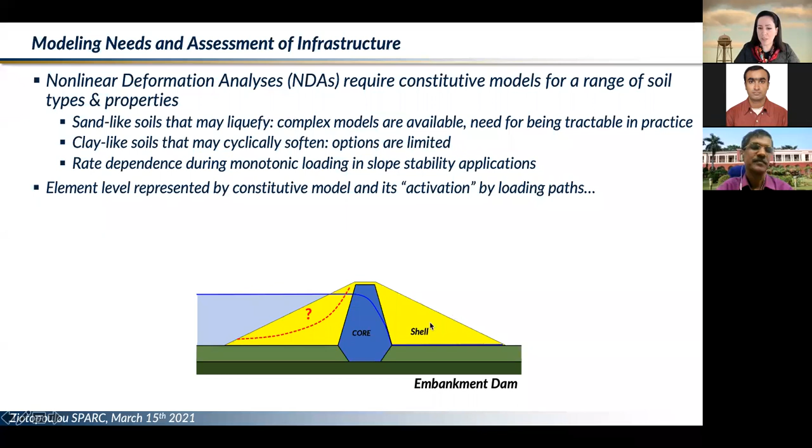In all of these types of simulations, the element level is represented by constitutive models, and I heard some mentionings from the earlier speakers regarding the utility of constitutive models. One needs to understand that those are activated by specific loading paths as they're activated by the problem at hand. Of course, one also needs to understand that simulating a system level is basically the assembly of not only the constitutive model, but also the platform, the different choices, the site investigation data, and the broader understanding that the analyst has of the problem at hand.

Just to keep everyone on the same page, constitutive laws typically describe the stress-strain behavior of soils. They can be expressed in either total or effective stresses, with different pros and cons depending on the application. In the broader form, they connect some stress increment with a strain increment or vice versa, where this D matrix, or tensor, can be as complicated as the problem needs it to be.

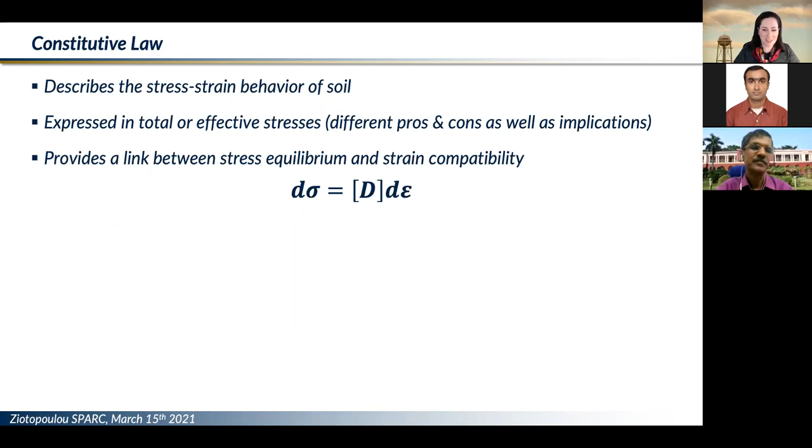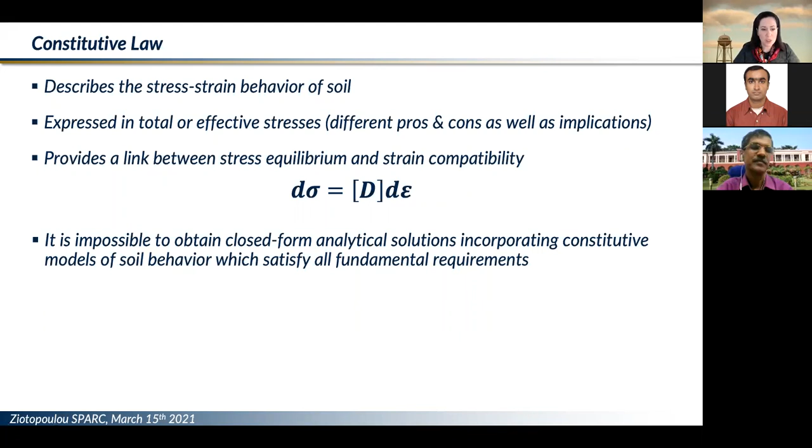Now, of course, it is impossible to obtain closed form analytical solutions and incorporate all the constitutive models of soil behavior to satisfy all the fundamental requirements that we may have for the soils that we're looking at.

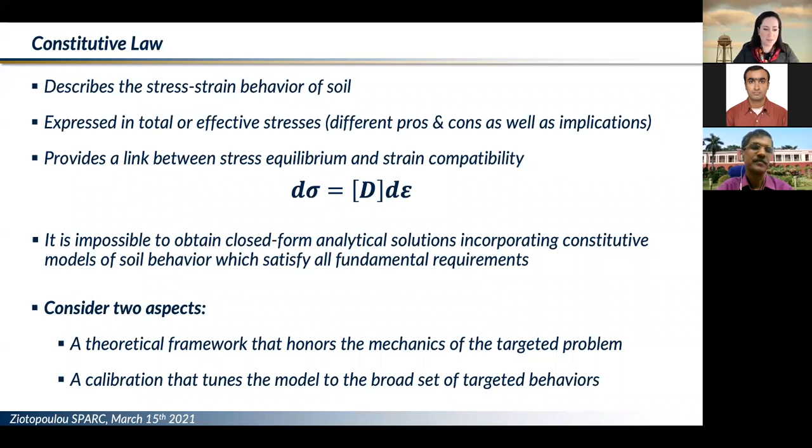Of particular interest, and something to keep in mind as we look through the different types of models I will be talking about today, we need to consider two aspects. One is the necessity to have a theoretical framework that honors the mechanics of the targeted problem, but also a calibration. It's usually convenient to see these as two separate procedures, of course intimately connected, but still separate, that tune the model to the broader set of targeted behaviors, aiming to address the different types of operating conditions.

So my presentation for today is going to briefly go over constitutive modeling of sands for nonlinear deformation analysis. In that context, I will focus on the broad range of behaviors we are setting our eyes on for sands. I will talk a little bit about the PM4Sand model formulation and calibration.

Then I will be spending some more time compared to the beginning on similar types of developments, but for plastic silts and clays, again for the context of nonlinear deformation analysis. Then depending on time, I will discuss a comparative calibration of PM4Sand and PM4Silt for the Cadia TSF tailings materials against some available laboratory data, openly available of course.

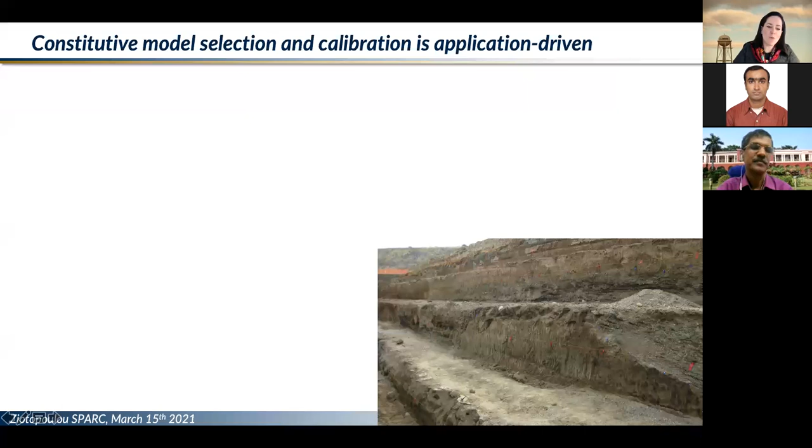I will share plenty of material so that each attendee can take this study as deep as they desire. But the one thing I want to keep in mind today is what we know from our soils in the field. In the most typical applications, the types of data we will receive are going to be SPTs, CPTs, shear wave velocity measurements, and then of course some index tests from the lab.

And it's only in more needed, or well-funded I guess, applications where we will get some more site-specific laboratory information. Starting from these types of information, we then rely on the broader body of knowledge that we have on soil behaviors, which provide us empirical or semi-empirical correlations, and then, of course, typical responses about what to expect.

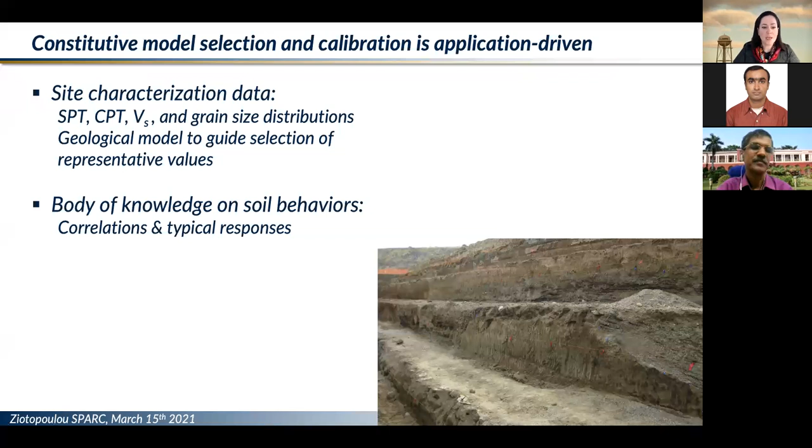Now, talking specifically about liquefaction and connecting now the types of properties we have with responses that we may want to keep our eyes on, we will be interested, of course, in triggering types of relationships, whichever one each one desires to use. Here I'm showing cyclic stress ratio versus equivalent clean sand corrected penetration resistance.

We can see that also as a relative density x-axis. We may be interested in how the cyclic stress ratio varies with the number of cycles. That can be viewed as the effects of duration. Here in this plot, the different types of curves are different based on the relative density that they represent.

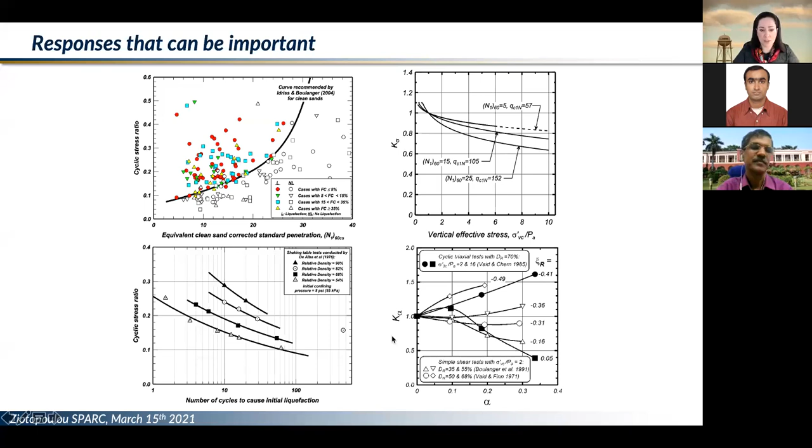We may be interested, and actually it may be necessary depending on the application, to honor the effects of overburden. Here, for those of you familiar with liquefaction triggering evaluations, captured as the K sigma factor, or equivalently the K alpha factor, targeted at correcting our cyclic resistances for the effects of sloping ground, compared, of course, always to the baseline condition of a level ground.

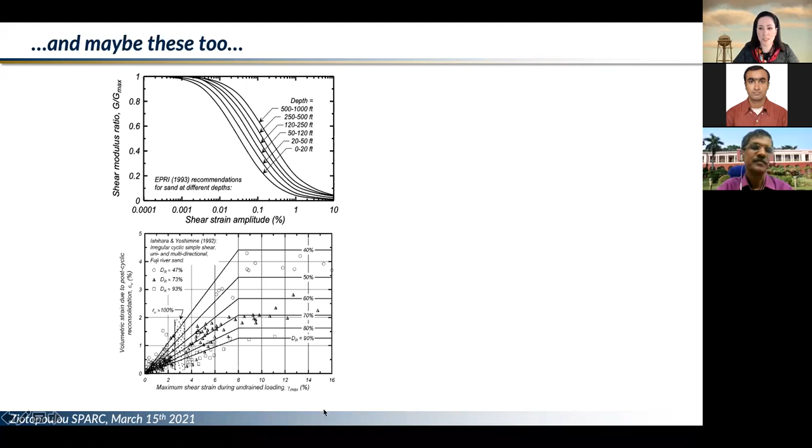At the same time, we may be interested in how a shear modulus is softening throughout the increasing strain amplitude. We may be interested in the post-liquefaction volumetric strains that lead to post-liquefaction settlements. And of course, we should never forget the monotonic drained and undrained responses that are determining how our sands are going to behave.

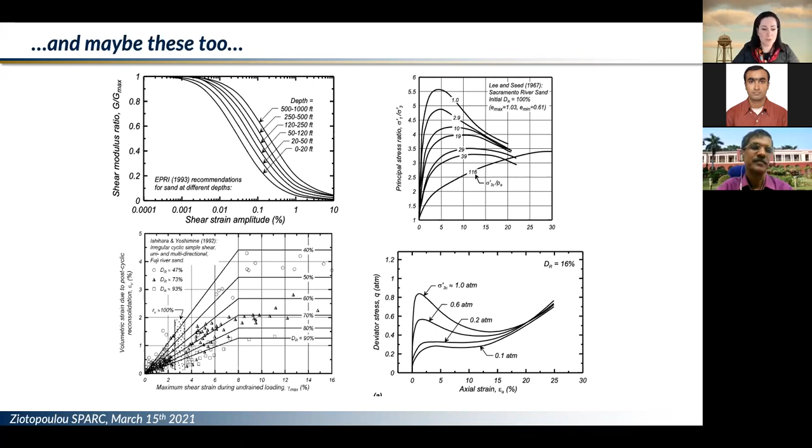Now, taking all these types of responses into consideration, we need to consider that depending on the application we're looking at, we may have a high variation of the operating conditions. The operating conditions being having loose to dense zones, drained to undrained loading depending on the scenarios, low to high confining stresses, particularly for dams, that can be really important, or we may have low to high initial static shear stresses. So ideally, if we want to have a model that is easily calibratable, usable, but can also capture the broad range of responses, one needs to keep all of these in mind as we move towards such developments.

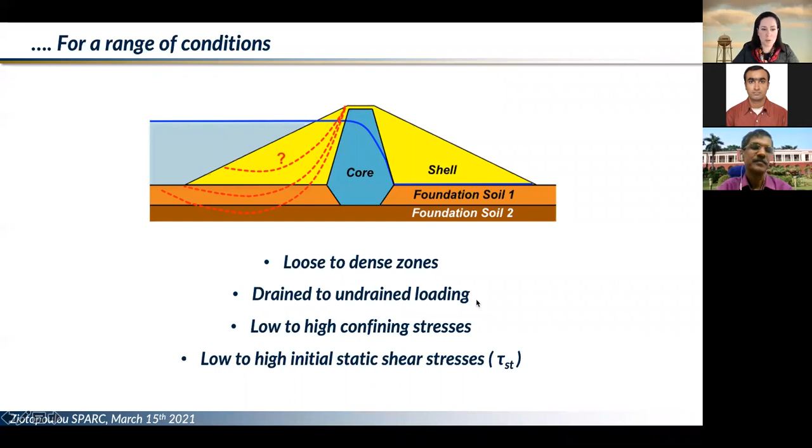I will briefly go into the formulation of PM4Sand now, with some historic context and then a little bit of the things we're looking at.

Now, in terms of history, we started developing it in 2010, and then moving to 2012 and 15, it got implemented as a dynamic link library for use in the platform FLAC. Now we have implementations performed by colleagues, of course, in Plaxis and in OpenSees. We will be releasing soon version 4, and sometime within this year or next, we're working on releasing a 3D version.

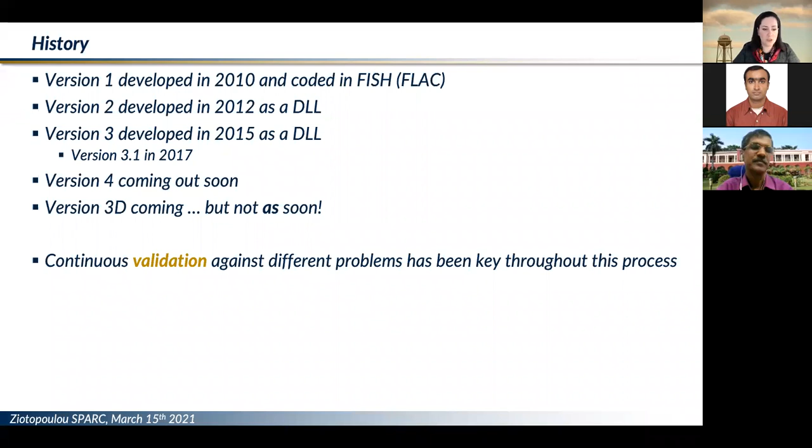And in all of these developments, they weren't just reformulations. All those developments were driven by continuous validation against the different types of loading paths that we run into in practice, either from friends in industry, from researchers, or from our own investigations.

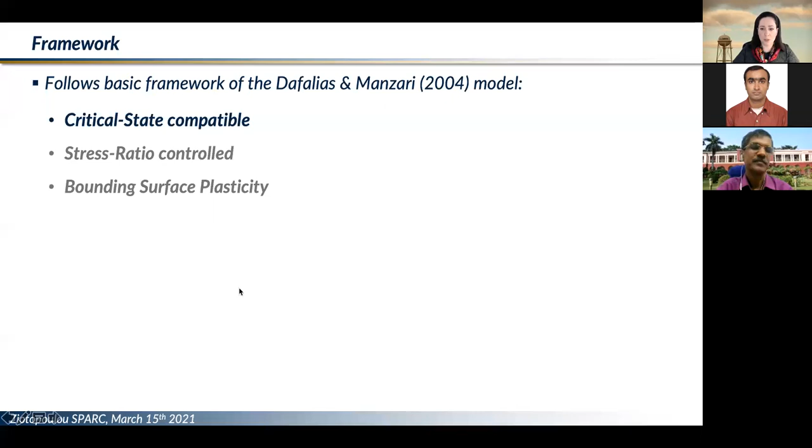I'm going to touch on the framework, and only on the aspects that are relevant to the remainder of my presentation. So as a framework, PM4Sand follows the basic framework of the Dafalias and Manzari model, and as such, it's critical state compatible, stress ratio controlled, and it follows the framework of bounding surface plasticity. So first and foremost, discussing critical state compatibility.

Here I'm showing relative density versus mean effective stress, the critical state line capturing the set of responses that correspond to the operation of large strains and constant shearing under constant stress that soils eventually reach as you shear them to large strains. The relative state parameter is captured as the distance of your relative density from the critical state line, through Bolton's empirical or semi-empirical relationship. We just need a metric to see how far away we are from the critical state line, and that's exactly what the relative state parameter does.

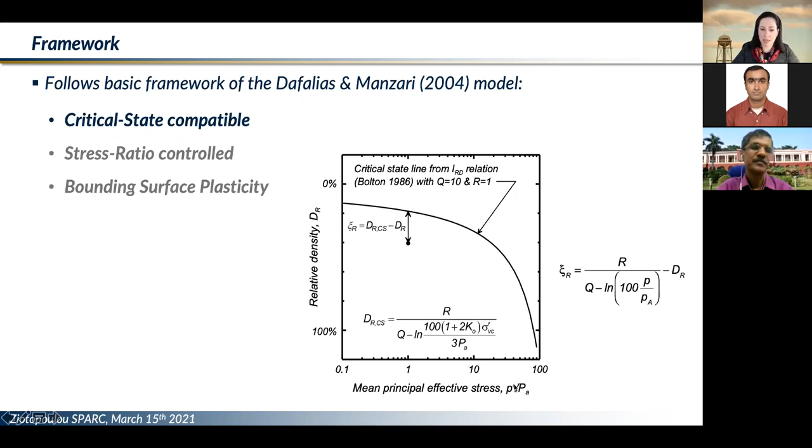Here I'm showing the framework in the simplified Q-P space. Essentially here we have an exaggerated elastic cone in space capturing the elastic range of responses. The parameter M defines the radius of this elastic cone. And then, of course, the moment you exit this yielding cone, you start behaving plastically. We have three different lines operating here.

The dilatancy line is separating the space between contractive behaviors if you're below it and dilative behaviors once you've crossed it. The bounding line is posing an upper limit to the stress ratios that the model can attain. And then the critical state line stays there as a function of the critical state friction angle.

I want to note here that the model is operating in plane strain, at least for now, and we have removed the effect of loading angle. So the critical state friction angle is getting directly mapped to the critical state line. The other two lines are a function of the critical state line, with two dials, and then a function of the relative state parameter.

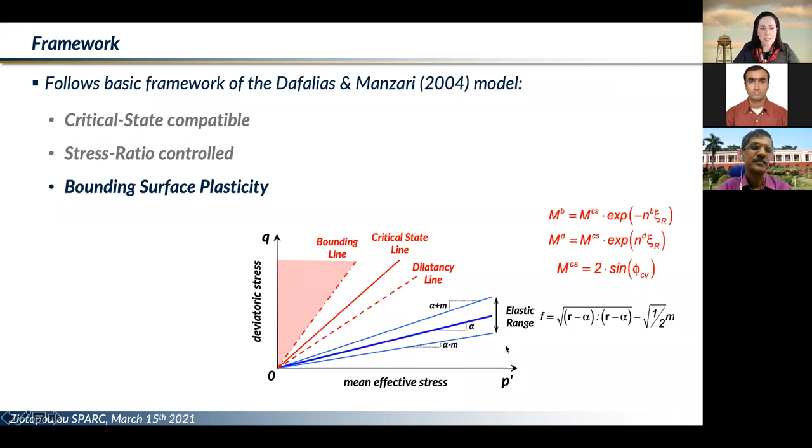What one can get out of these equations is that as you progressively shear your soil and your relative state parameter goes to 0, eventually these two lines are basically rotating like a pair of scissors in space before they eventually collapse on the critical state line.

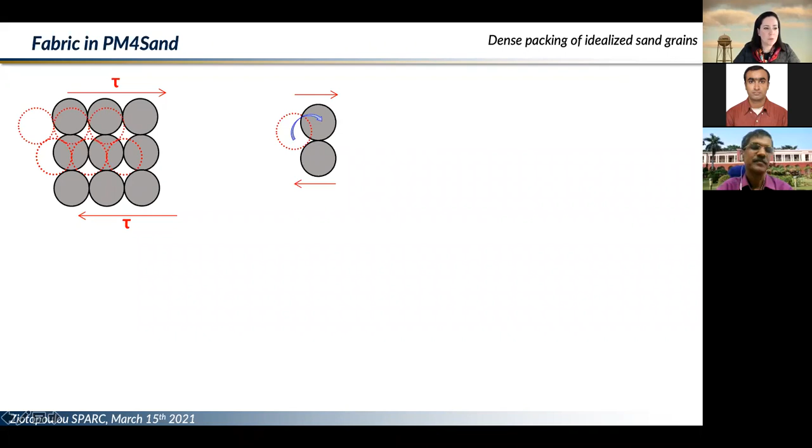Now, the Dafalias-Manzari model had a huge contribution to our ability to model, particularly the effects of liquefaction. In that context, I'd like to define the fabric tensor as the tool that gets us to that response. So if we consider a dense packing of idealized sand grains undergoing shearing, I'm showing here two isolated grains. As we shear them, these grains are going to roll on top of each other, experiencing what we call dilation.

Dilation is herein denoted as a negative plastic volumetric strain, associated with a plastic shear strain increment. The dilatancy is defined in plane strain conditions, that's why I have this square root in the denominator, as the ratio of the plastic volumetric strain increment over the plastic shear strain increment in the denominator.

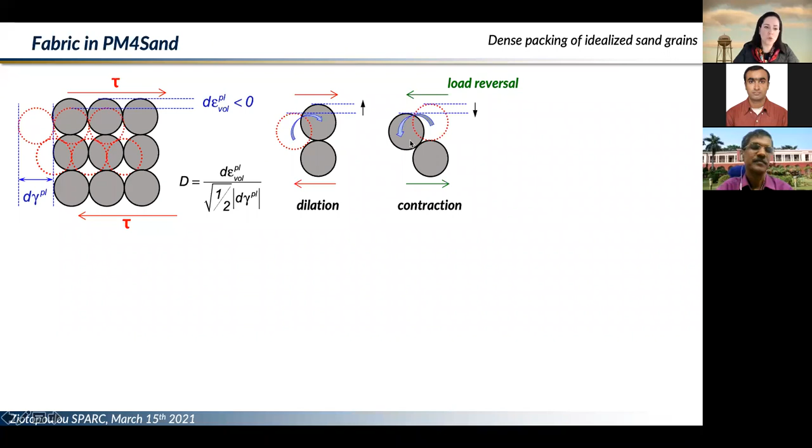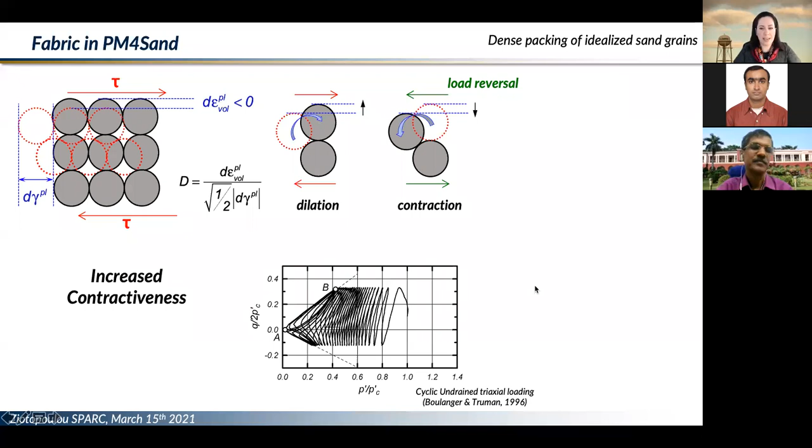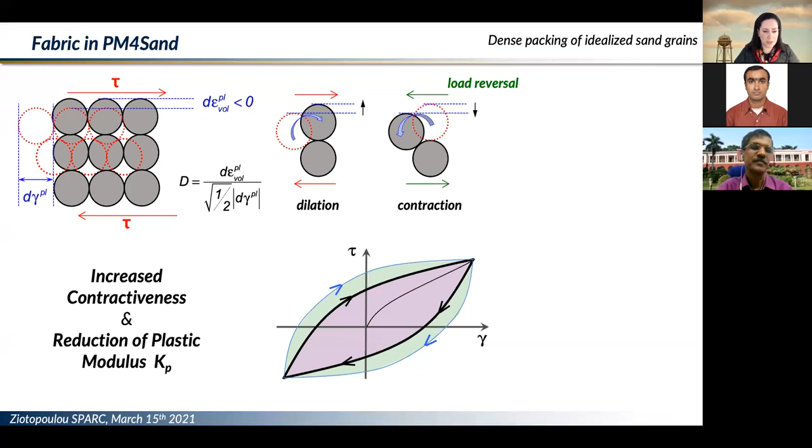In PM4Sand in particular, fabric—let me go one back—so the fabric was introduced as a tensor, basically as a metric of how much dilation you're getting as you're shearing your soils, such that later it can be used as an enhancer to the contractiveness. In PM4Sand, in addition, we use the fabric tensor and a cumulative metric of it to facilitate the reduction of plastic modulus in hysteretic loops and facilitate better capturing of damping mechanisms.

Now, of course, needless to say that the Dafalias-Manzari model does offer a great framework as the basis to model the effects of liquefaction because of all its features.

What we did with PM4Sand is we advanced the formulation and did a generalized calibration at the equation level to improve consistency with a broader body of experimental data and design correlations. A few changes are listed here, including the addition of fabric history, connecting plastic modulus, elastic modulus, and dilation to fabric and fabric history as it got added to the model. We also applied different constraints on the dilatancy to honor published relationships

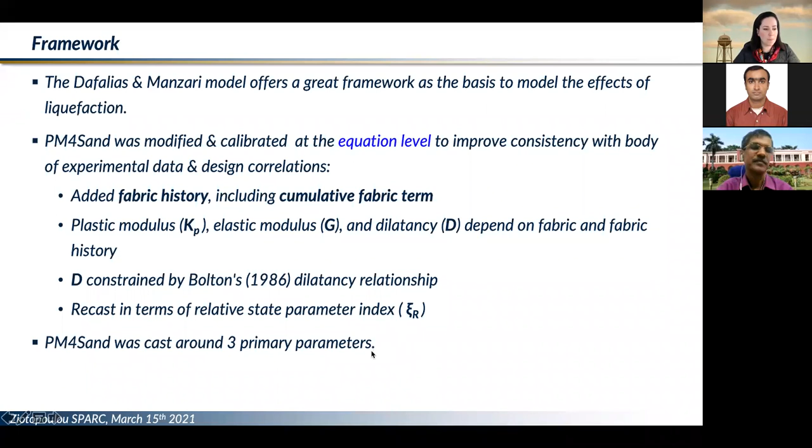between peak friction angles and critical state friction angles, and everything was recast around the relative state parameter. Most importantly, and I'll touch on that in two slides, PM4Sand was cast around three parameters addressing usability in practice. The way we went about it was to prioritize simulating behaviors important to evaluating earthquake-induced liquefaction effects.

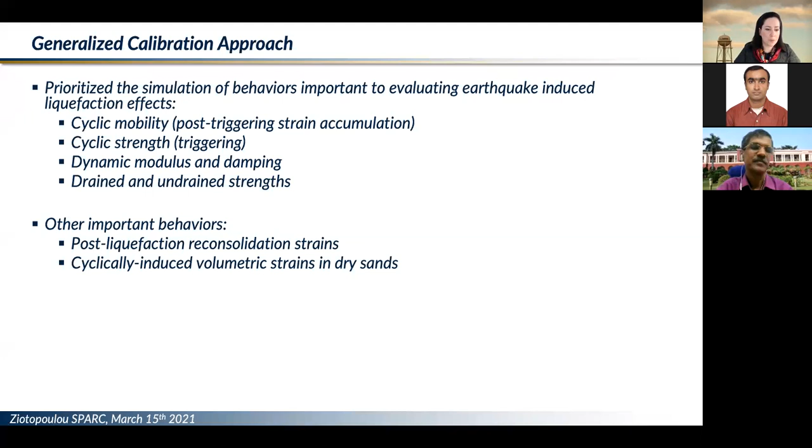The four sets of responses I want to emphasize are: cyclic mobility, the accumulation of strains after you trigger liquefaction; the cyclic strength, which becomes a matter of calibration; the behavior of dynamic modulus and damping throughout various strain amplitudes; and the ability of the model to honor drained and undrained strengths. Other important behaviors, as I showed before, are the post-liquefaction volumetric strains and the cyclically induced drained volumetric strains in dry sands.

We placed an overall emphasis on providing reasonable agreement with a broad set of design correlations. I won't go over these, at least for PM4Sand. I have some for PM4SILT, but we have everything - drivers, manuals, and sample applications - on our website at UC Davis.

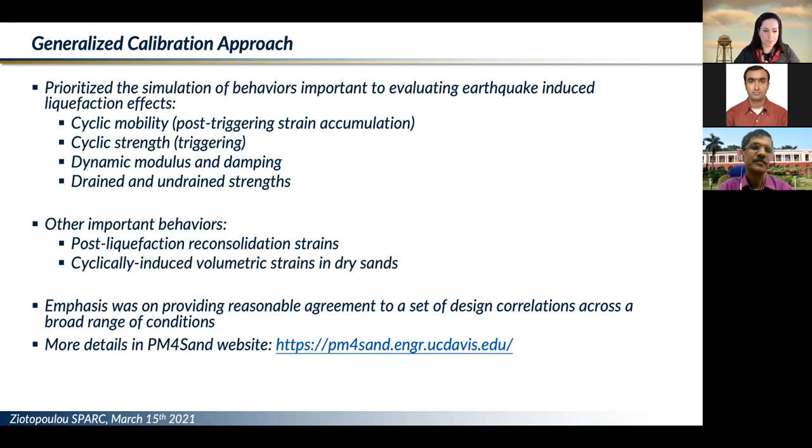Of particular importance, as I mentioned before regarding usability, is the casting of the model around three primary parameters commonly available from field information. The relative density can be estimated from SPTs or CPTs, and that will adjust the stress-strain responses.

The shear modulus coefficient is essentially a dial on the Gmax relationship, which can be calibrated either against in-situ shear wave velocity data or any available correlations from the literature. Then, in its most basic form, when activating the three primary parameters, the HP naught coefficient - the contraction rate parameter - needs to be calibrated iteratively to match the cyclic resistance to the criterion we want to use for our analysis.

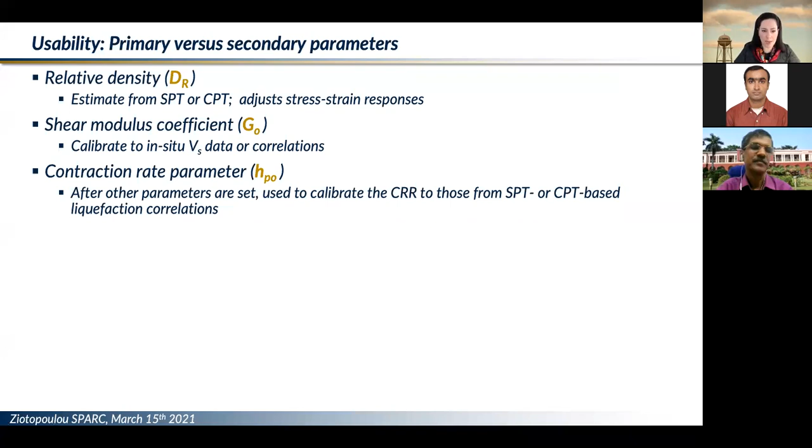Of course, that range of behaviors pertinent to liquefaction can only be captured because we have 21 secondary parameters operating in the background. These have default values that can be changed if the user has the knowledge and has exercised the model adequately - a more guided intervention - depending on what type of data you have available. If you have more site-specific data, more parameters can be calibrated. But for now, these have received default values from the exact generalized calibration I talked about before.

I will not show any comparisons for this model. All of those are available in the manual, but I will share enough so that you can get the philosophy behind the PM4 model.

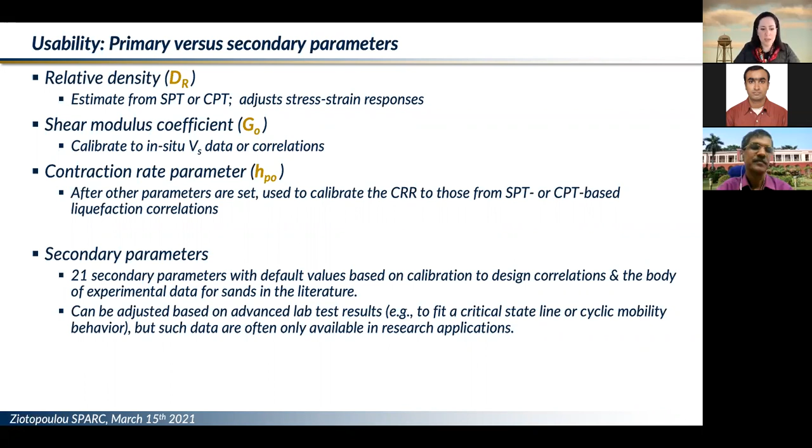So I've broken down the three parts of my presentation into some summative remarks. For now, I want to reiterate that PM4 is a critical-state compatible, stress-ratio-controlled, bounding surface plasticity model developed to approximate the range of behaviors important to geotechnical earthquake engineering practice. The complexity we've added was necessary to track the complex behaviors exhibited by liquefying sands.

We talked about the three primary parameters addressing usability in practice. And then, of course, that's something not directly supported by the slides I shared, but definitely the idea of knowing the responses you're after and then deciding whether this is the right model to use - and whether you can actually get it to work for your application.

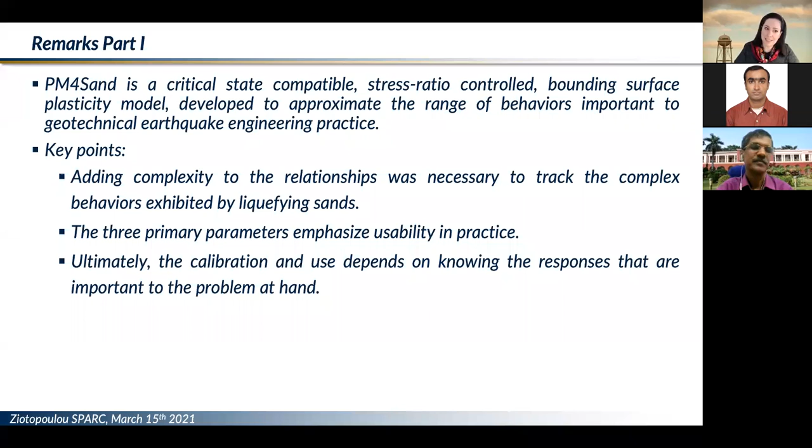I need to emphasize that for now, the implementation is limited to plane strain problems, so there's no 3D version yet. The formulation does not have a cap, meaning you can only get elastic compression along a constant stress ratio K0 consolidation line. So you cannot use the model to capture crushing or compression at large stresses, such as those at a cone tip or a pile tip. And as I already mentioned, we have removed the Lode angle dependency, essentially implying that the friction angle is exactly the same in extension, simple shear, and compression.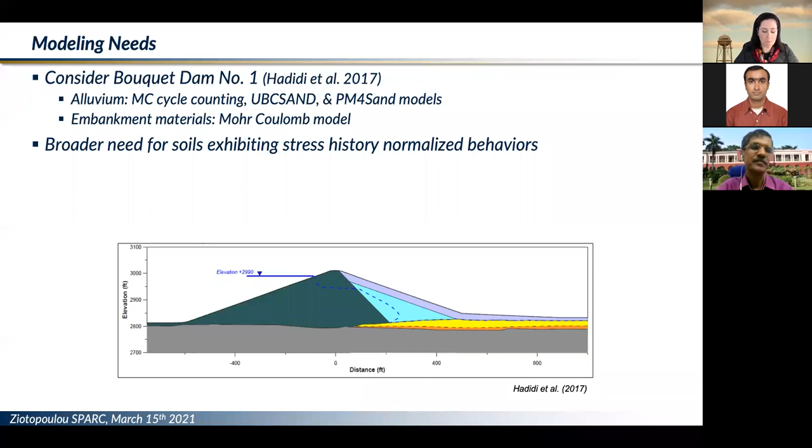Having gone over the background framework without too many details on the formulation, that was capturing the philosophy of PM4 sand. Now I want to talk about PM4 silt, which follows the same philosophy but is targeted at different types of soils. The need arose for constitutive models usable for clay-like soils that demonstrate stress history normalized behaviors. We named the model PM4 silt, to avoid calling it PM4 clay. But if you're interested in the dynamic aspects of clay response, the model can be used there as well. That said, it's not usable in consolidation problems, just because of the formulation.

I talked before about the types of behaviors we're interested in for sands. For clay-like soils, the primary behaviors of concern for seismic applications pertain to strength, whether viewed as undrained strength or normalized undrained strength, and cyclic strength, either the cyclic resistance ratio or the cyclic shear stress normalized by the undrained shear strength. For earthquake applications we're also interested in dynamic properties, such as the maximum shear modulus and how it degrades with increasing strain amplitude. This is similar to before, but in a bit more detail now.

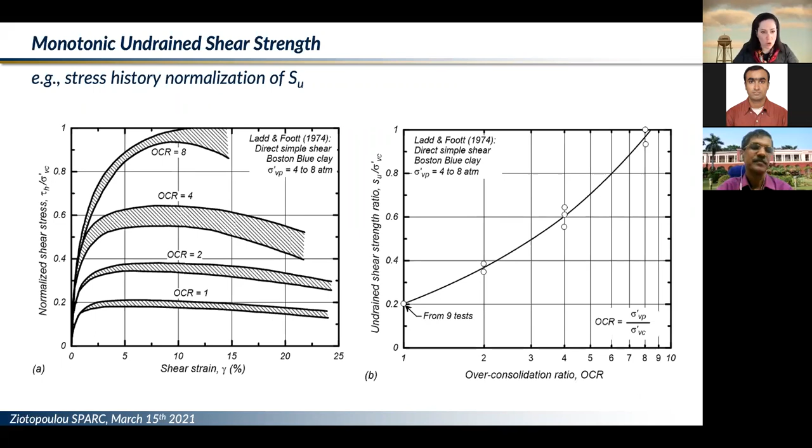For clays, we're interested in the monotonic undrained shear strength as a ratio, something we've seen historically from numerous publications. It will vary with OCR, but in our approach we do not specify an OCR. Instead we specify what we desire for an undrained strength ratio, giving the user a lot of control over that.

In terms of cyclic loading, here I'm showing experimental results from Cloverdale clay, shown as a stress-strain loop on top and a stress path on the bottom, which we can consider typical results - I have more coming up next. What we observe in a stress path plot is that these stress paths shed a lot of effective stress, going up to a pore pressure ratio of about 80%.

This is something we often see in silts and plastic clays, which typically don't go all the way to 100% RU. Non-plastic silts, on the other hand, more typically go to 100% RU. At the same time, from stress paths we can observe that the moduli don't drop as low as they tend to in liquefiable sands or non-plastic silts - you get fatter hysteresis loops, eating up more energy. We still get this progressive accumulation of strains, and we need to be able to capture that. These differences, but also commonalities, are what drive the buildup of PM4 silt on the framework of PM4 sand.

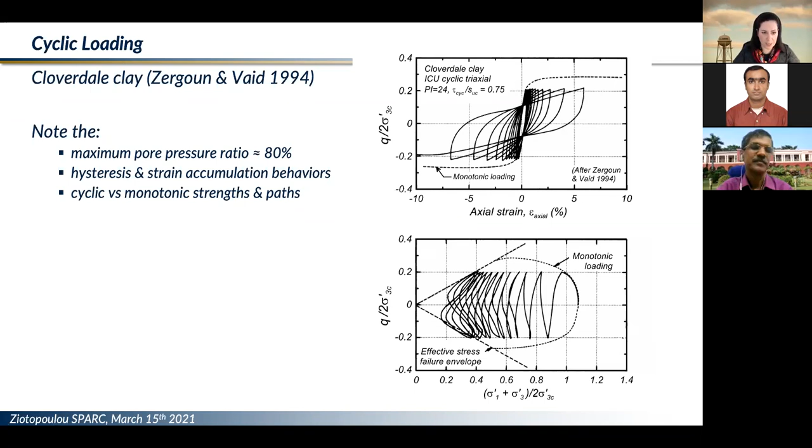In my next slide I also have additional experimental data from Potrero Canyon, from a former PhD student out of UC Davis. For increased plasticity index, we see more distinct, fatter loops and the shedding of effective stresses, but not all the way to zero. Comparatively, for a similar material but with a PI of 0, so non-plastic, we see behavior resembling that of sands.

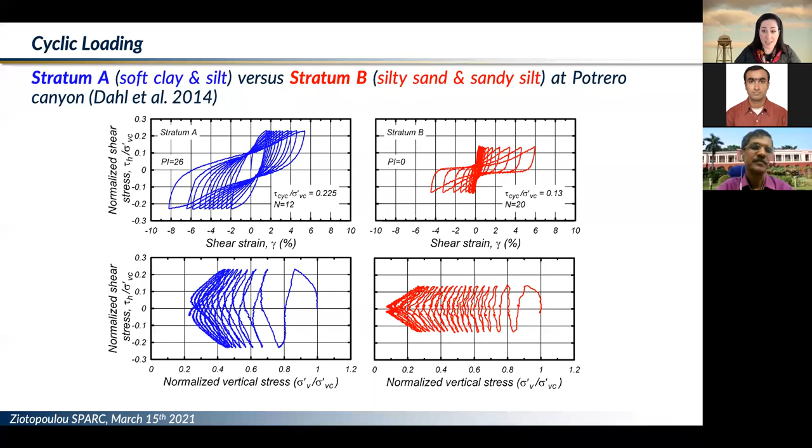We're also after cyclic strength ratios. For clays and plastic silts in particular, one way to think about strength is to take the cyclic stress and normalize it by the undrained strength, as shown here on the left and right y-axis. The issue has to do with the rate of loading expected in the field from earthquakes versus the rate of loading typically used in the lab. For 1 Hertz, a typical reference shearing rate in the lab, your monotonic strengths from lab tests are going to be slower, so this plot goes above 1 for low numbers of cycles - you can see it goes up to 1.3 or 1.4.

As you go to higher numbers of cycles, say 10 to 40 in this mid-range, you get about 80 to 100% of your SU, but that's about 60 to 70% of the strength at 1 Hertz. So to get the slope right, you have to bump up your monotonic strength to get the dynamic strengths right.

In the model, we explain this by getting the right slope. This can be fit inherently from the model, and then get the slope also right and the strength. We have taken out rate effect.

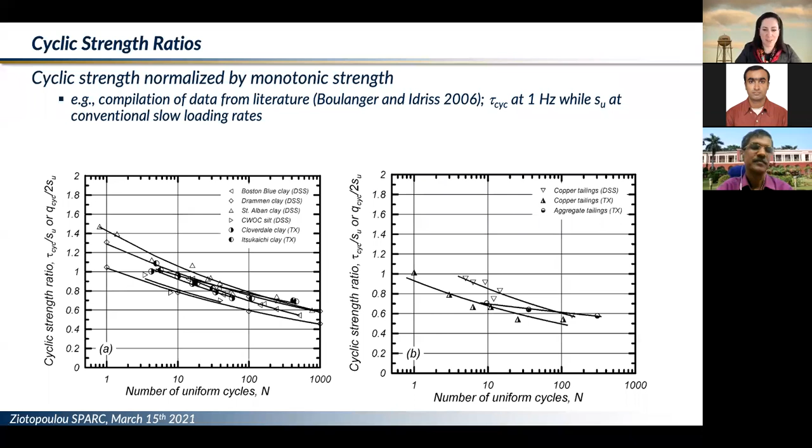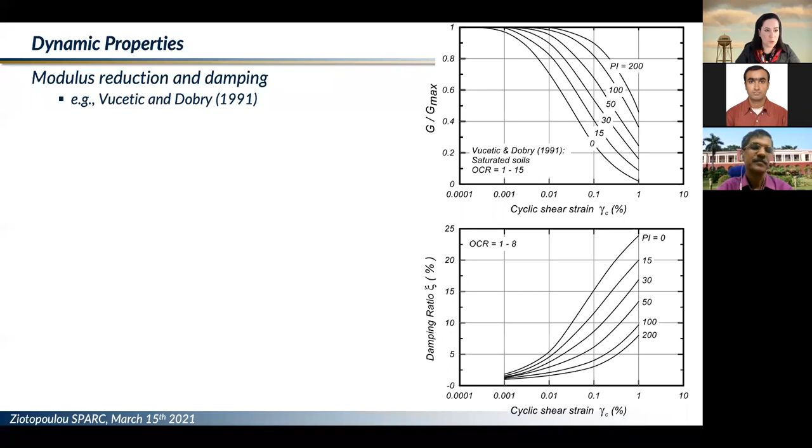We have added them back up for PM4 Silt R, but not now for seismic applications. Additionally, and something that is really well established for clay-like material, there's of course the modulus reduction and the associated increase in damping as you progressively load a soil.

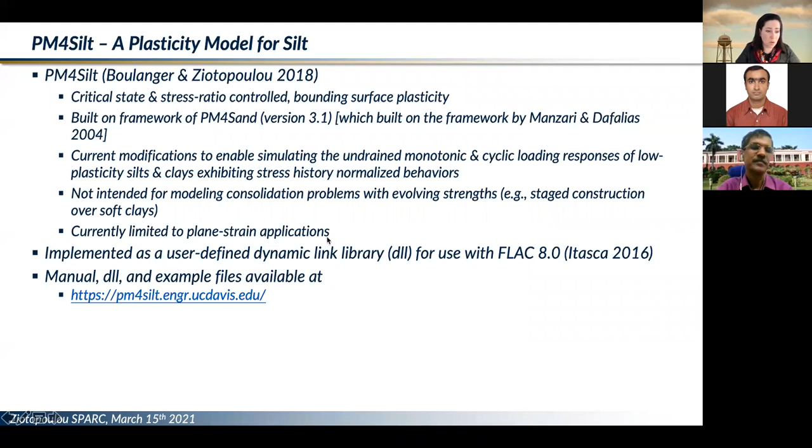Quickly going over the formulation, but with a little bit more detail compared to PM4 Sand. We first developed PM4 Silt in 2018. It inherits most of the features of PM4 Sand, but basically all the modifications enable simulating the undrained monotonic and cyclic loading responses for low plasticity silts and clays. Similarly to PM4 Sand, it is not intended for modeling consolidation problems with evolving strengths. And again, this is also limited to plane strain applications.

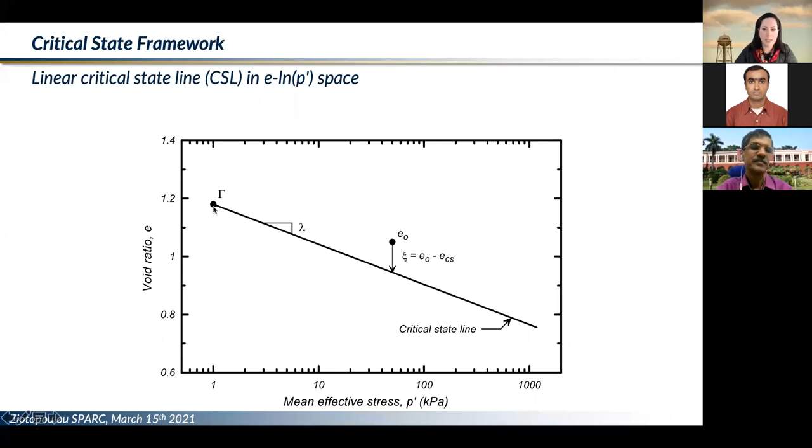The framework now has been a little bit changed, and I will show only the features that are of particular importance. First of all, we have switched to a linear critical state line in the void ratio ln P space. Here, compressibility is captured with the slope lambda and the y-intercept gamma. Other than that, everything is the same as before.

Now, the trick here, one of the things we have emphasized for providing ultimate power and selection ability to users, is to let the user choose the undrained strength. Of course, you put in a void ratio, you can specify the undrained strength. The undrained strength controls the mean effective stress, as I'm showing here in this illustrative plot at critical state. And that will anchor where the critical line has to be such that you can honor your targeted Su.

So we're switching the calibration idea from not only inputting initial parameters and then letting the model tell us what the undrained strength is, but we have the model honor everything that the user knows about their material, such that it can get reliably honored. So it's basically the undrained strength that needs to set the critical state line.

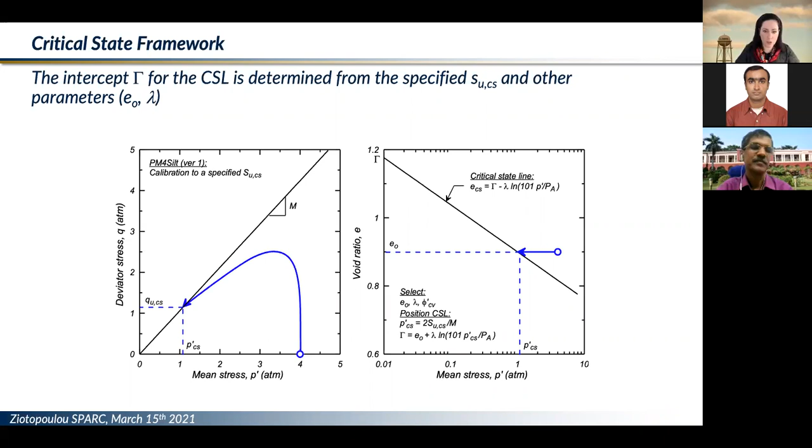The framework of the bounding, dilatancy, and critical state lines remains the same as before, but now we don't have the relative state parameter anymore. We just have the state parameter, and other than that, the formulation regarding that stays the same. This is the view of the bounding and dilation stress ratio for a constant state parameter.

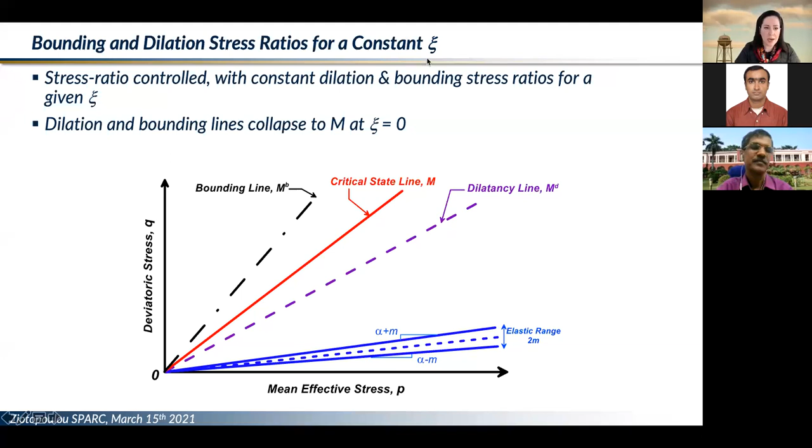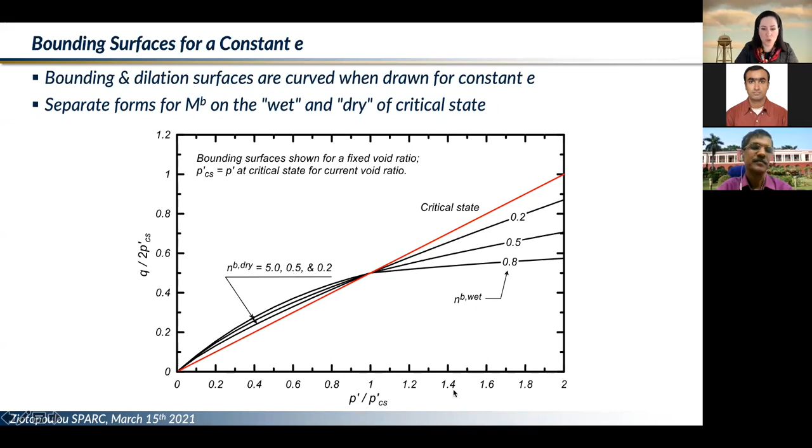The important thing to keep here is that the NB wet does control peak strengths, and I will show some example calibrations in a bit.

Discussing a little bit about dilatancy and other aspects, we did modify the dilatancy to have a ratio of P prime relative to the minimum attainable P min value. So now we have locked in P min as a 1/8 of the critical state mean effective stress, but that can be adjusted. Other dependencies are the same as in PM4 Sand, and this is exactly what I'm emphasizing here.

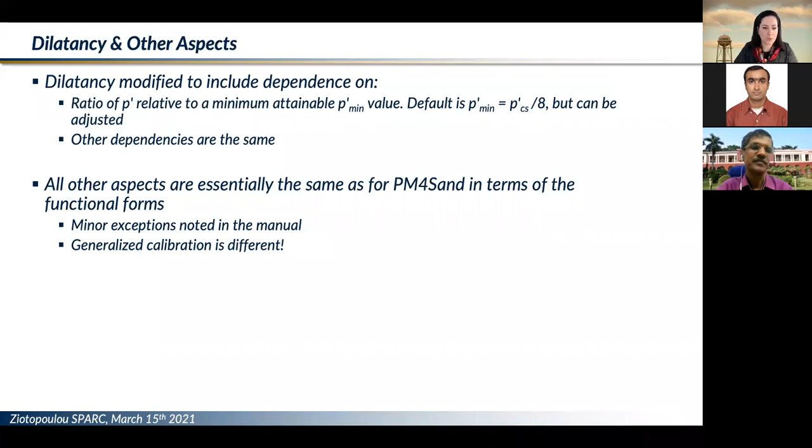Drawing parallel philosophies now from PM4 Sand, we have 4 primary parameters, actually 3, depending on the type of application you want to have. The logic is exactly the same as in PM4 Sand. You can input undrained shear strength ratio or an undrained shear strength. If you put it in both ways, the undrained strength will win, and that's what's going to be implemented internally. This is not the peak strength. This is the strength at critical state, and it's important to note that.

I'm listing here potential pathways for specifying that type of value. The shear modulus is performing the exact same operation as in PM4SAND. It can be calibrated to in situ shear wave velocity measurements to anchor the maximum shear modulus.

The contraction rate parameter can be calibrated to match the cyclic strength. Then the 4th parameter, FSU, is optional unless you want to do end of shaking type calculations. But you can use it to degrade the strengths for the effects of cyclic remolding, sensitivity, or changes in loading rate and post-earthquake stability.

So you don't have to change models after you reach the end of shaking, which is something that is very typically performed. We're trying to keep one model throughout the whole simulation.

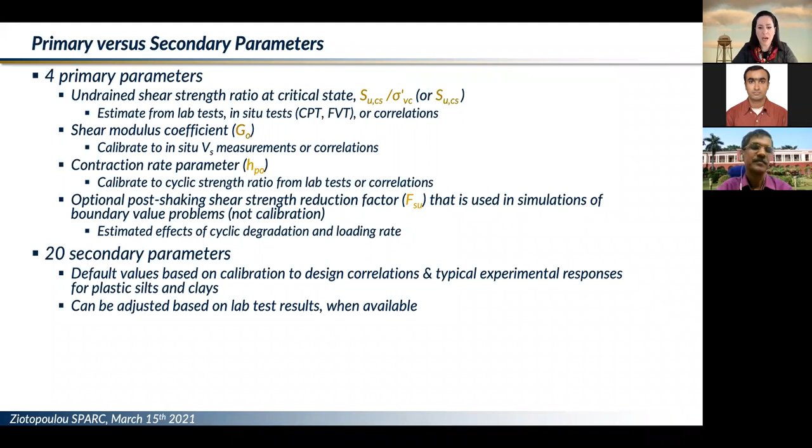Of course, similar to before, there are 20 secondary parameters, again following the similar philosophy, and again targeting the types of responses that I set forward as priorities earlier.

Now I will show you what we mean by generalized calibration and how we try to get a range of behaviors that are reasonable compared to what we obtain in typical applications.

There are 2 aspects to this generalized calibration: the idea of model development, which goes back to the history I told you before, and how we constantly check, perform, and receive feedback such that we can see if anything needs to be adjusted, changed, advanced, or reformulated.

But it's also about targeting and demonstrating the functionality of the model, giving a range of responses that will facilitate adoption in practice, which then gives feedback for model development. So everything goes hand in hand.

Here I have some indicative values for the types of things I will be showing. The manual and everything we have published on this model contains a much broader range of indicative responses.

I will start first with monotonic undrained direct simple shear responses. Keep in mind that all of these are single element simulations in FLAC, in the implementation for FLAC 8.1, and the responses here are all with default parameters.

In these plots, I'm showing a stress-strain response, and then a stress path for different strength ratios. As you can see here, 0.25, 0.5, and 0.75.

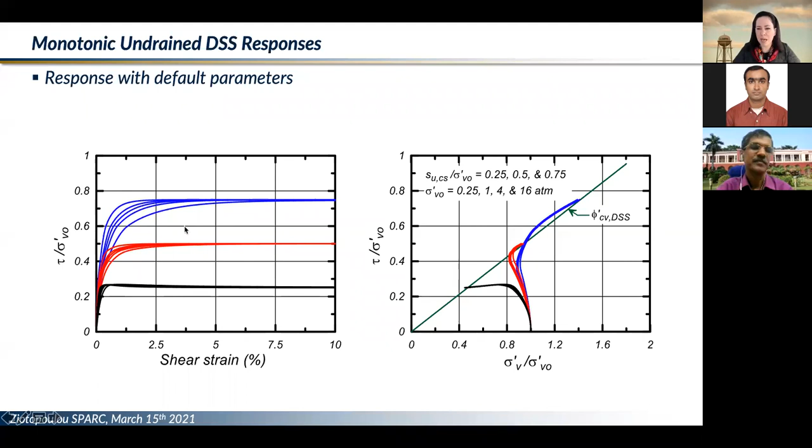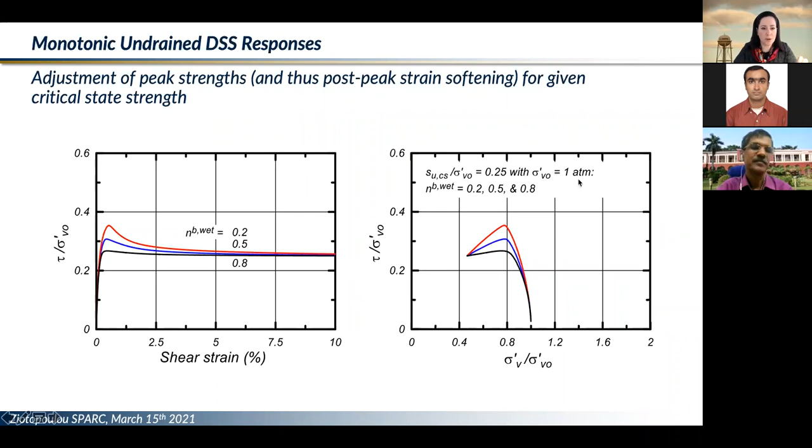I want to quickly show what that post-shaking FSU factor is doing here. Everything you see is run with a 0.25 undrained shear strength ratio, and an overburden of 100 kPa. In this driver, we run the single element, which is what would happen also in a system level analysis, all the way to 10%.

Then we implement that FSU factor between 0.8 (blue line), 0.5 (red line), and 0.2 (green line). What happens is that you impose that strength factor, and you can change the strength that will operate after a specific shear strain threshold. You can do that anytime, but the intention is that you do it post-shaking, and account for the post-shaking effects of remolding, associated softening, and so on. These plots demonstrate that utility.

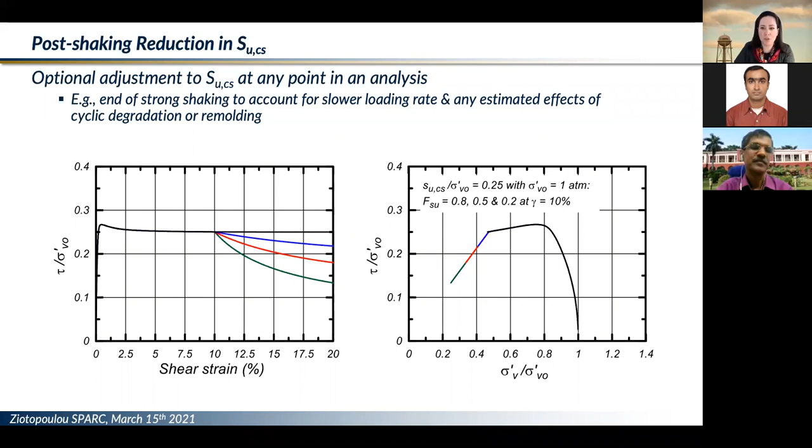I'm going to look now at two illustrative responses from cyclic direct simple shear single element simulations for different types of conditions. The left column shows stress-strain loops, and the right column shows stress paths, all under an undrained shear strength of 0.25, normalized with overburden. Progressively, between rows 1, 2, and 3, we increase the static shear stress ratio, basically increasing the sloping ground conditions on these types of elements.

We can see different types of things here. Mainly, I want to draw your attention to the types and shapes of the stress-strain loops, and the control of excess pore pressure accumulation. This can be controlled by an internal parameter, and it can or cannot get activated depending on the types of information you have. Then there's the progressive accumulation of strains as we are softening the soil.

Similarly, for a SU ratio of 0.5, this one is a little stronger. It has a lower excess pore pressure, and doesn't quite make it as close to the origin as the other one. As you increase the static shear stress ratio in rows 2 and 3, the model will accumulate more strains compared to before, and it's even stronger, especially for an alpha of 0.2.

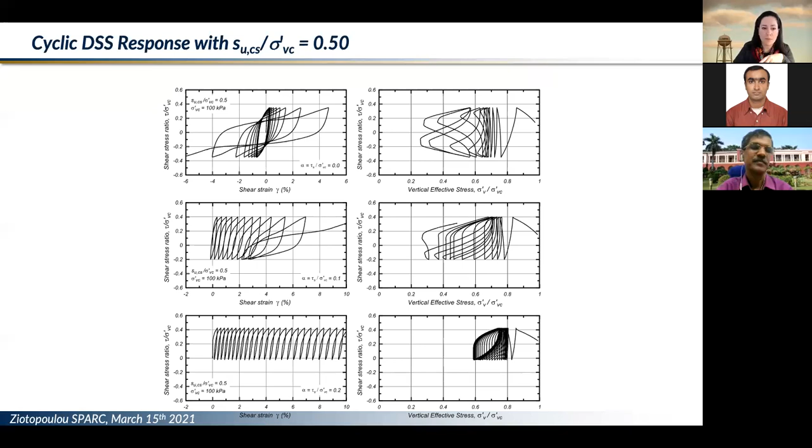We can also try and compare that to indicative responses, like the Cloverdale clay responses I showed before, or other indicative lab tests that we may have. This is again the generalized calibration, giving illustrative responses of what the model will do with activation of the primary parameters and then minimal activation of everything else.

Showing here the effects and response with some default parameters for the effect of overburden. We have basically no effect of it for lower strength ratios, this is for 0.25. As we increase the undrained shear strength ratio, we progressively get a dependence. The different curves here are for 1, 4, and 8 atmospheres. This can be thought of as going from loose sands to dense sands, and you have less dependence here, but you still have some, not definitely as much as we have in sands, but still something to expect.

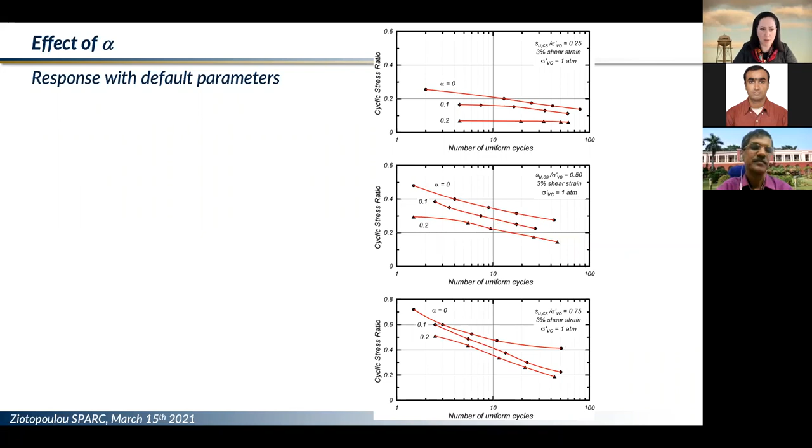Last but not least, we want to see how alpha, the static shear stress ratio, shown here for 0 level ground conditions, and then 0.1 and 0.2, increasingly changes the effects of sloping ground, again for 0.25, 0.5 undrained shear strength ratios, and then 0.75. We can see here, something we knew from before, that a static shear ratio can be detrimental for clays and low plasticity silts.

I said earlier that we're interested in getting the modulus reduction and damping. Here I'm showing results only for a strength ratio of 0.25. As a reference, I'm keeping my eyes on the well-established curves by Vucetic and Dobry from 1991 for plasticity indices of 0 and 15. As you can see, compared to sands, these do not show much dependence on overburden as we know from sands.

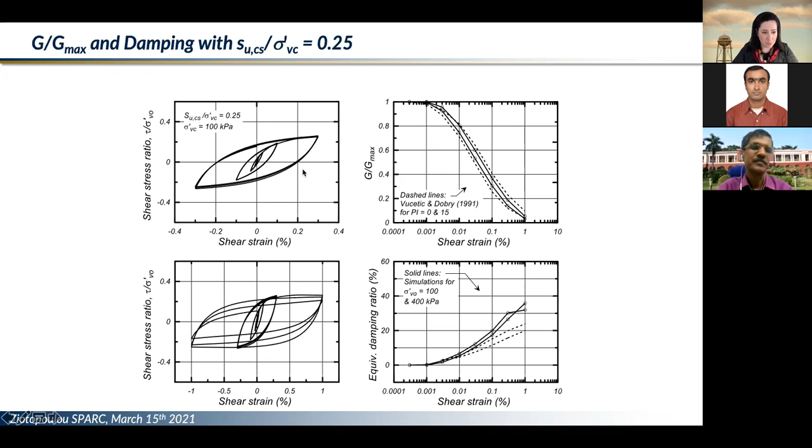The model has been calibrated to honor these types of responses, and you can see the responses as the solid lines here. The dashed lines are the Vucetic and Dobry curves, and the continuous lines are the softening of shear modulus and increase of damping that we get from the stress-strain responses in drained cyclic direct simple shear testing. This is what the model will do at default.

But if the user desires, for example, here I'm showing an indicative calibration for different H naughts. H naught is one of the secondary parameters that does control this aspect of the behavior. So if you have site-specific curves for the low plasticity silt or clay, then this is definitely something to activate and look at.

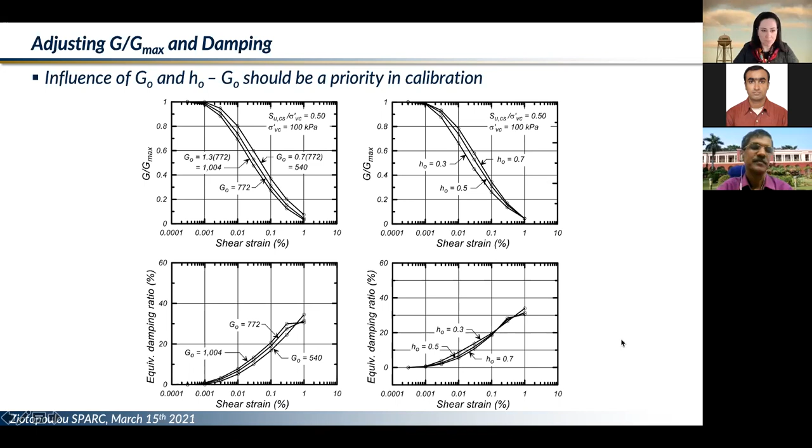My remarks for the PM4 silt section of this presentation, and as I enter my last part for today: PM4 silt was developed to provide improved modeling for low plasticity silts and clays for nonlinear deformation analysis. I want to emphasize there's no consolidation line. Going back now in time, that's why we didn't call it PM4 clay. But in fact, if you're interested in the dynamic responses of clay and those alone, then the model can definitely work, because those are going to exhibit stress history normalized behaviors.

Now, the focus for PM4 silt was on seismic applications, and again, it doesn't model consolidation problems. It doesn't capture problems where you have evolution of strengths as you do a stage construction, and for soft clays or other types of similar soft materials. The calibration, again, depends on the available information, and that addresses the issue of usability and, of course, adoption.

In its most basic form, it does need an undrained shear strength or an undrained shear strength ratio, a Gmax, your shear modulus at low strains, and then the h_po, which will calibrate the strength. I showed you how the default values lead to the broader range of behaviors that you saw later. And of course, keep in mind that yes, you can adopt all of those to any site-specific data you may have.

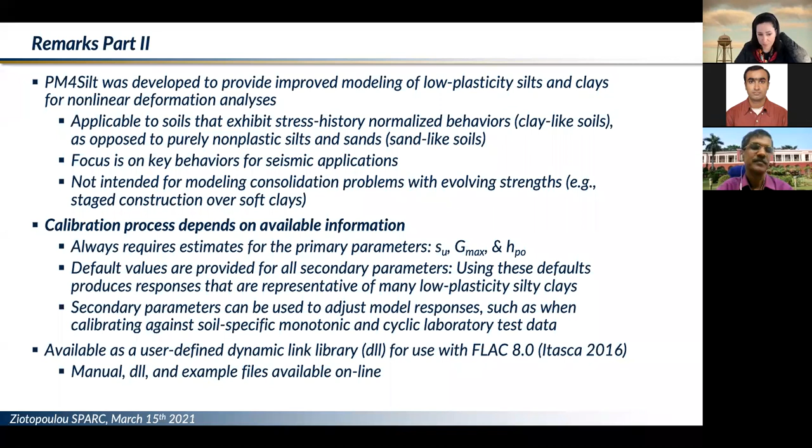For the remainder of this presentation, I do not think we're going to have time to go into PM4 silt, but no problem. I just wanted to show a very sample calibration of both models actually for the Cadia Northern Tailings Storage Facility out in Australia.

So I think all of us will be familiar by this very impressive failure. Cadia Operations is a mining and then processing complex located in New South Wales in Australia. It had a height of about 90 meters and it failed in 2018. Of course, fortunately and unfortunately, no major damage was caused by this failure, as the tailings were contained by the southern part of this complex as a tailings storage facility.

This has been studied extensively by review boards and researchers and then practitioners, all published by Jefferies et al. in 2019. Three of the speculated failure mechanisms were that either there was a progressive failure of the foundation materials, there was an excessive yielding due to pore water pressure buildup and raising and the associated increased pore water pressure, and then the pore water pressure buildup due to 2 magnitude 3 very minor earthquake events that occurred the day before this failure. Following this failure, lots of samples were collected and lab tests were conducted on the tailings and the foundation materials to investigate the mechanisms leading up to this failure.

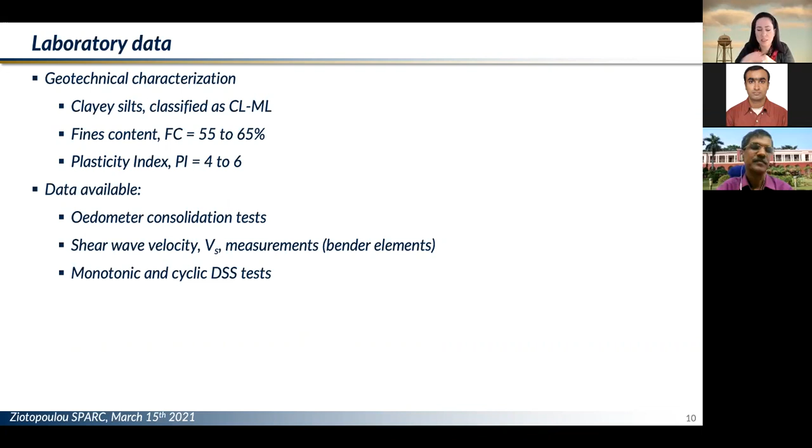Looking now in the types of monotonic behaviors that we obtain here, again, I'm showing standard stress strain and stress path plots from the data by Jefferies et al. from 2019, and identifying the target behaviors, because what we're doing now is we're taking a step back and we're saying we don't know if this material is quite, it's going to behave as a silt or a sand, or at least preemptively. So we ought to take a look at the data and see what kind of responses seem to be operating, so that we keep some relevance to the system level expected behavior.

Now, these are results from an undrained monotonic test, and this is conducted under 3 atmospheres, so quite a high overburden stress and level ground conditions. Now, the 3 main aspects to keep in mind here is the post-peak strength, and then the peak undrained shear strength, and of course the small shear strain stiffness. That is basically this slope here that is operating.

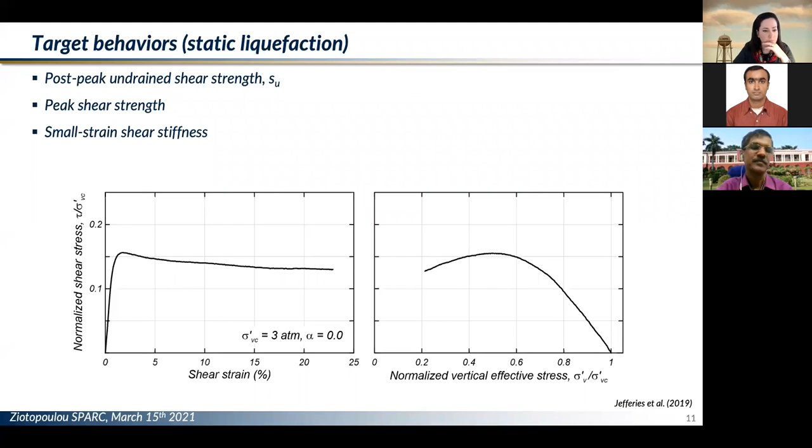Looking at example behaviors from the cyclic aspect of the response, and looking at the cyclic effects, whether that's liquefaction or cyclic softening remains to be seen.

Now we're seeing results from undrained direct simple shear test. The criterion that was targeted as representing triggering was a single amplitude of 2.5% in one direction. These did have a little bit of a bias, an alpha of 0.05, and a quite low overburden stress of 50 kPa or 0.5 atmospheres.

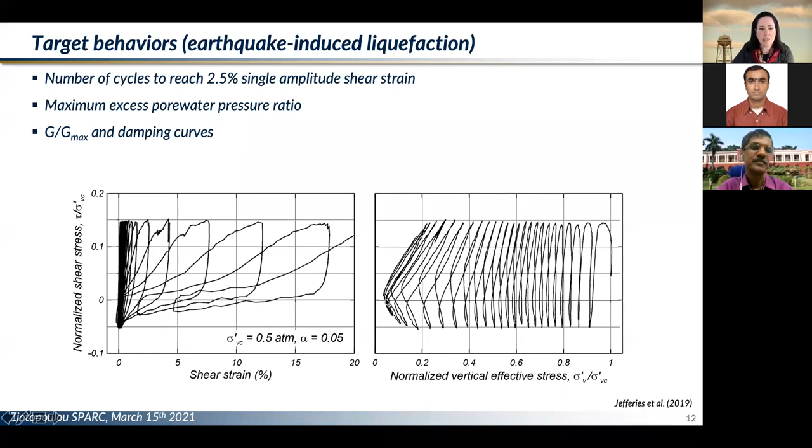We can see different things here. The two most important things are a very strong accumulation of strains, a resemblance of the loops to those of a sand, a high shedding of overburden stresses, and of course, an associated very high increased excess pore pressure ratio.

If we compare the two, we can see there is some dilatancy, especially in the cyclic testing. And we can see that we can have a high accumulation of strains, but it is really hard to know which model to use and which not to use, because both seem to be hinting that either PM4 silt or PM4 sand would be applicable.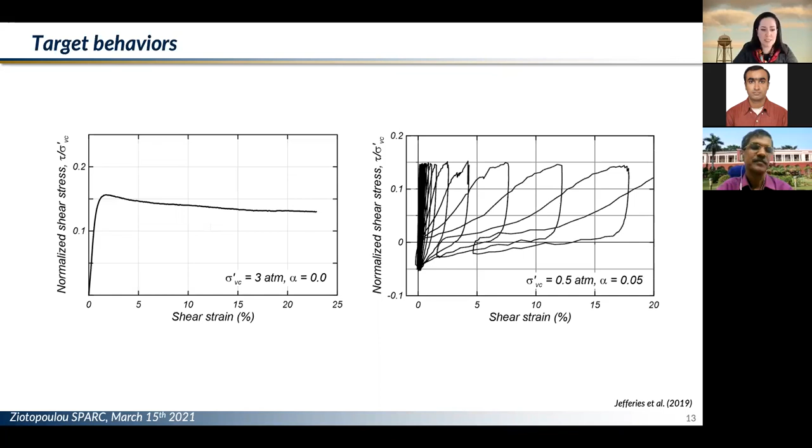So what we did is we did indicative calibrations of both to see which one would be more applicable. I'm going to go over this quickly, and then I'm going to wrap up.

Now, for the calibration of the PM4 silt model, following some very distinct steps, looking at how to honor the data that were available through the Jefferies et al. report, there are the primary parameters shown here at the top, and then the secondary parameters, some of which we did activate because we had a lot of data available.

First of all, we honored the measured parameters from monotonic DSS test, so this undrained shear strength ratio of approximately 0.13 as we see here. Then for step two, we honor the critical state friction angle, the angle that we considered as mobilized. Then from oedometer consolidation tests, we anchored the compressibility and the initial void ratio for this test.

Looking at published relationships between Gmax, the dial G0, and NG, which captures the way that the modulus changes with depth as we reach higher overburdens, and comparing that with maximum values of shear modulus published by the authors of the report, reconciling the two, we ended up activating a 350 value for the shear modulus coefficient.

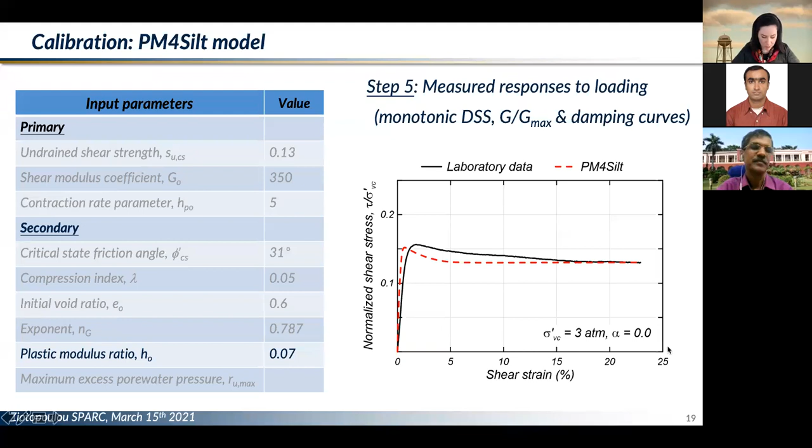Last but not least, for steps 4 and 5, we did some single element simulations, monotonic ones, to see how PM4 silt with these parameters compares to the laboratory data. Of course, some refinements here can be performed, but overall we consider the response quite satisfactory. This also helps us anchor the H0 parameter for the plastic modulus ratio.

Last but not least, because we wanted to see both aspects of the response and how a monotonic calibration can end up leading to honoring the cyclic response, here I'm showing the laboratory data we had from the report. That's a stress path, and what we see is a very high increase of excess pore pressure ratio, which means we bumped up our RU max, one of the secondary parameters, to 0.95, trying to fix that aspect of the response.

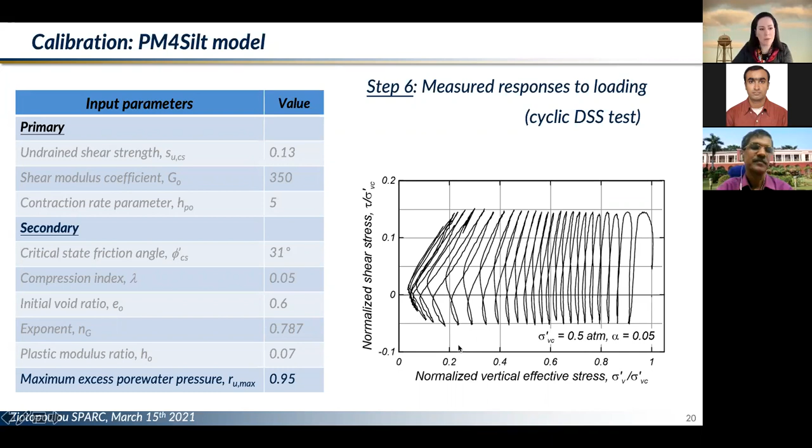If we hadn't done that, the default value that PM4 silt allows for the model for the buildup of excess pore pressure to take place under is about 80 to 90%. So we changed that a little bit.

Looking now at the cyclic strength and the strain criterion set forward by the researchers who published this data, we want to compare and anchor the HP0 calibration iteratively, of course. Here I'm showing comparisons of cyclic stress ratio versus number of cycles for a single amplitude of 2.5% between simulations and the laboratory. This is not random; it had to do with this iterative variation of HP0.

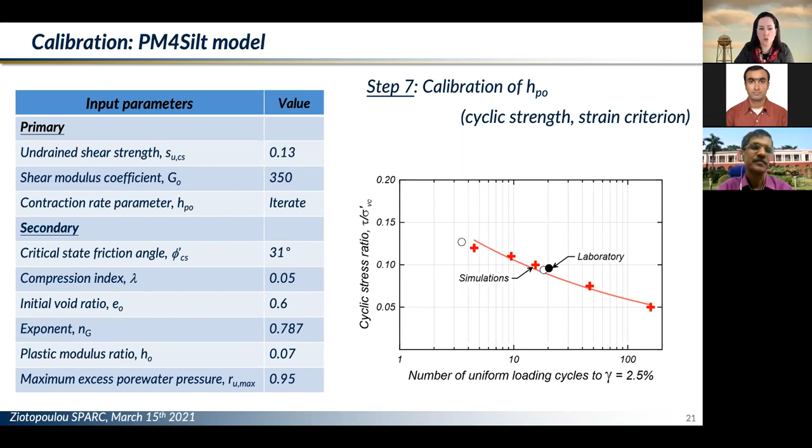Taking another step back and seeing how PM4 silt performed against the data, we can see some discrepancies, but overall we could consider this a satisfactory match within reasonable engineering effort.

For the monotonic responses, comparatively, doing a similar calibration for PM4Sand with the types of information we had, it was nearly impossible to honor the peak strength, the softening of this response. So we consider that PM4 was more naturally capturing the behaviors shown by the data.

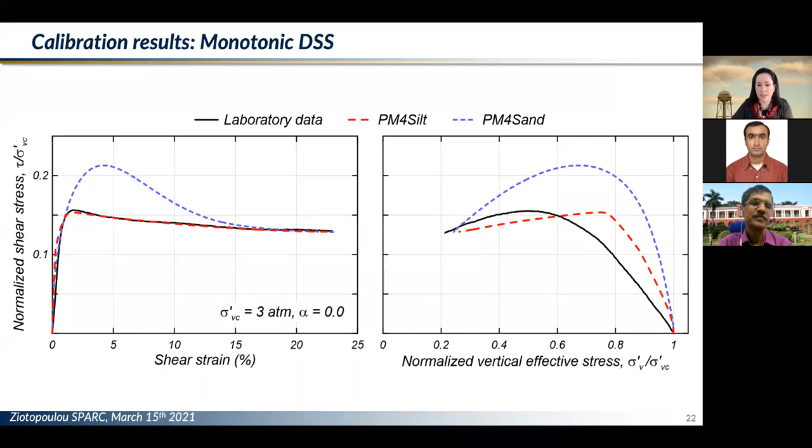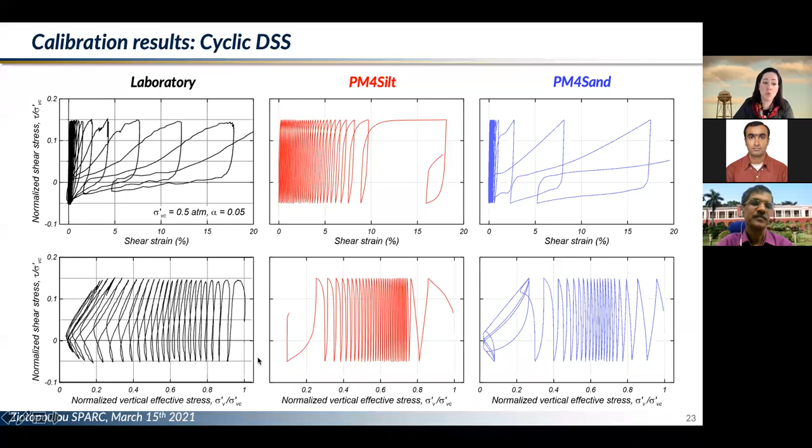At the same time, when we started looking at the cyclic responses and seeing how PM4 and PM4Sand would each approximate the cyclic evidence from the lab, here I'm showing again the laboratory on the left, PM4 in the middle, and PM4Sand on the right. We can see that because of its formulation and the way it was calibrated, PM4Sand does do a better job, particularly in the reduction of vertical effective stresses, as we can see on the stress path, which was identified as one of the target behaviors here.

Looking now at what we get on implied strengths, and then Gmax, G over Gmax reduction with shear strain amplitude, keeping the Vucetic and Dobry curves as a reference. The red curve is what we got before from PM4. From PM4Sand, we get slightly higher cyclic stress ratios, but still in the range implied by the laboratory, so one can consider those very satisfactory.

PM4Sand is also very consistent with the Vucetic and Dobry curves, provided those are the ones of interest. We did some extra evaluations comparing that against the EPRI curves for sands, which do capture better the effects of overburden, and the calibration was again a very good match.

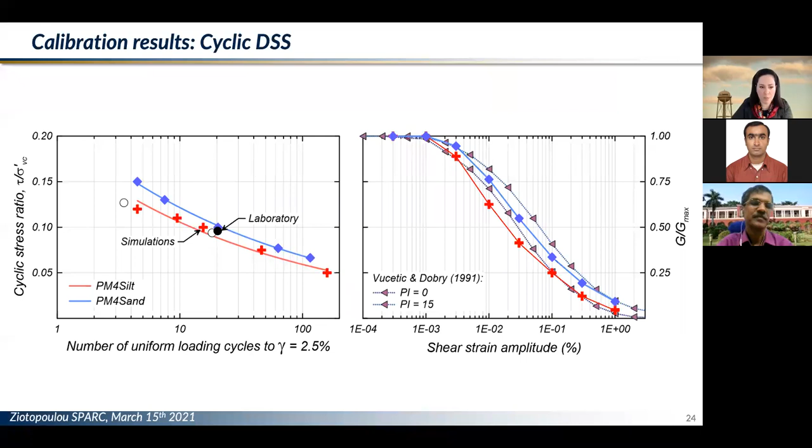Remarks for part 3, where I showed this comparative calibration of PM4 and PM4Sand. Both were shown to reasonably capture, respectively, different types of responses. We will consider, however, that PM4 would be better used for a system level assessment of static liquefaction.

So thinking a little bit about what kind of responses may be of interest, we would probably suggest that PM4Sand is used for the system level assessment of earthquake induced liquefaction. So it is up to the user to decide which mechanism needs to get emphasized.

Now, of course, all of that is closely, intimately related to the quality and the detail of the lab tests available, and then our ability to identify the target behaviors that are dominating the failure mechanisms. We have not done any system level evaluations yet, so this was more to

emphasize what calibration would look like, and how basically it's not only about just blindly saying this is the material you have and this is the model you need to use, but it's more about choosing the behavior and then letting the behavior choose the model for you.

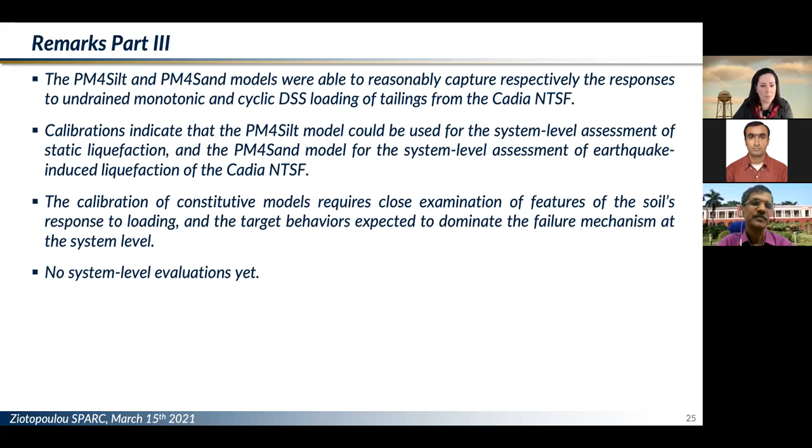Now, I don't have time to go over some other slides that I have prepared. Just as a preview, I want to tell you that one thing we have coming up is the rate dependent PM4 version. The motivation for that was the undrained creep-based failure of the Feijão Dam I, documented by Robertson et al. in 2019. So basically looking at how we can do slope stability estimations, long-term stability estimations, that may still take place in an undrained manner.

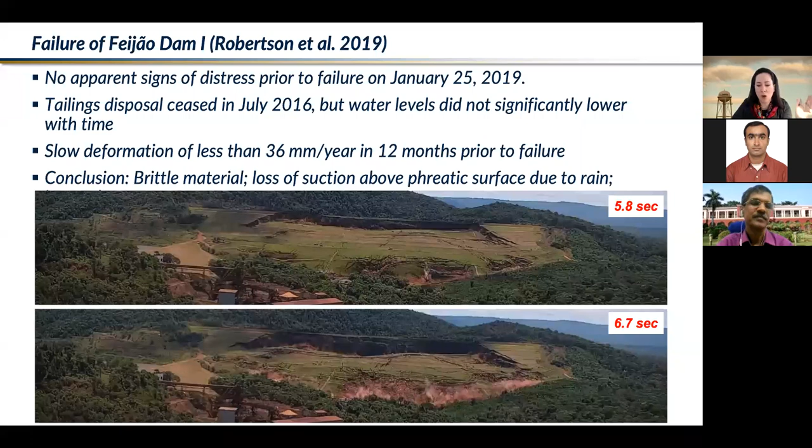Okay, so something that is coming up, it's still in beta testing. We will be sharing updates as they come. It is an extension of PM4 and we suggest that it's used with a creep module of FLAC. So that's what we're targeting at.

It will come out within the next month or two, hopefully, and I expect that will significantly advance our ability to simulate tailings storage facilities under undrained creep type of conditions.

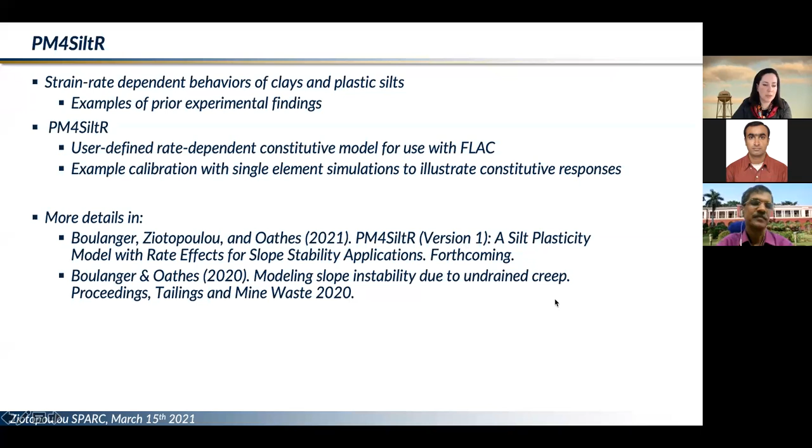You can find more details in publications by Ross and Tyler, who have examined this at a system level. They already have two publications out from USSD and the Tailings and Mine Waste conference, and our formulation manual will be released very soon.

So with that, I will just want to reiterate the fact that I shared with you a family of stress ratio-based critical state compatible bounding surface plasticity models. Our goal is to capture the range of responses between sands and clay-like soils in either seismic or slope stability applications. The philosophy is common across all of those, and it addresses the idea of identifying key behaviors.

We have emphasized usability through primary parameters, and generally I tried to go over quickly the different types of things that we may be looking at, basically aiming to equip you with some references so that you can perform your own investigations and satisfy your own intellectual curiosities.

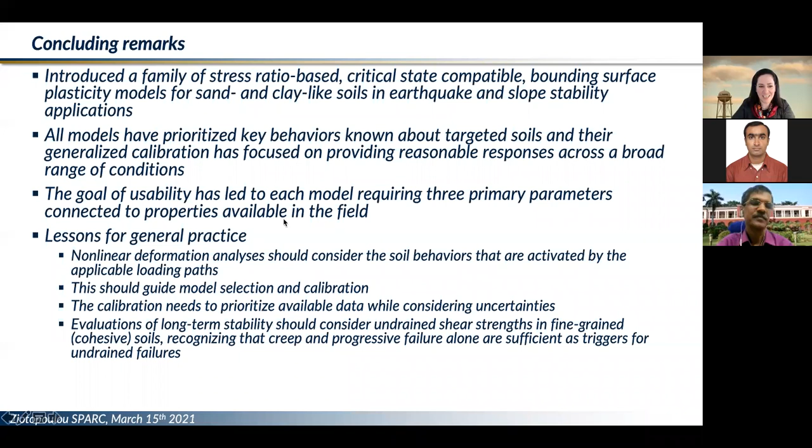Professors Dafalias and Kutter out of UC Davis have been phenomenal and instrumental through all these years of different developments we have had. Different parts and pieces of this research have been funded by NSF and the Department of Water Resources. And here at the end, I have some condensed references where you can find lots of the work that we have performed through the years.

And with that, I am done.